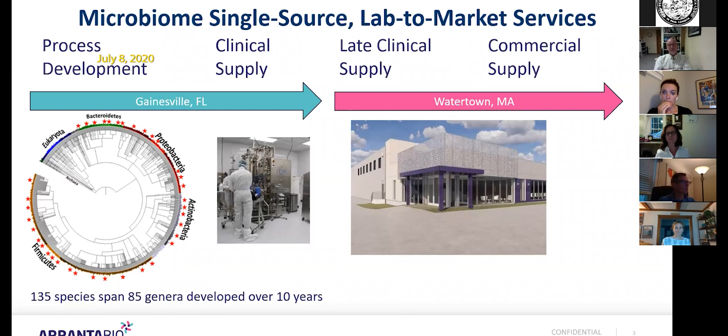This is a nice little rendering of the two-story building. We're going to dress it up a little bit—we put some windows up above to let natural light into the building. He will go over some of the changes we're going to make on the outside. We purchased and we're going to renovate 650 Pleasant Street; it was a high bay warehouse owned by a number of people.

We're turning that into lab space and light manufacturing, along with a new 5,000 square foot office and visitor space, which is right here. We're going to dress up the front of the building as well, put some nice landscaping in there, and make it a nice outdoor amenities area for our employees. We do actually have current offices at 480 Pleasant Street that we're leasing out right now.

That's while it's being built and into the future, so it's actually a great walk between there and 650. You have to go right by Russo's, so that's not the worst thing in the world. And then again, a little less than $100 million investment into the Watertown facility, and our goal is, if not by the end of the year, then close after that, 100 plus employees.

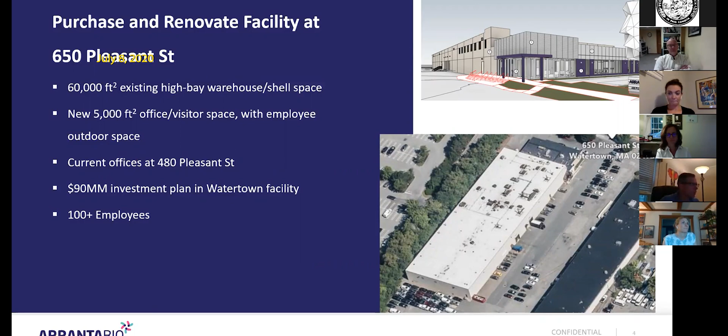This is the overall facility. Here's just to orient yourself. Here's 650 Pleasant Street. Here is the Stop and Shop parking lot, the river, and obviously the area of concern back here. And so, Hugh, I will turn it over to you.

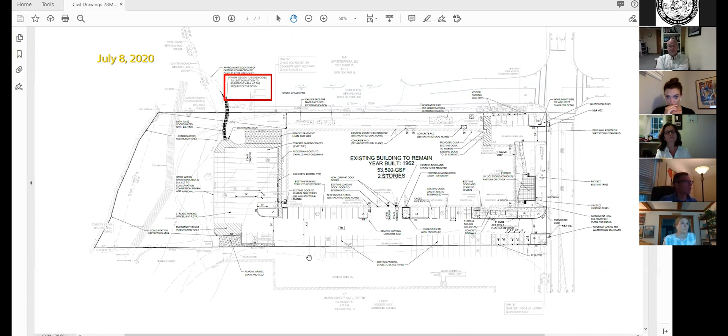Hugh? Sorry about that, I was sitting here quietly, but muted.

By way of a little orientation, the 200-foot riverfront area extends up from the bank of the Charles River and diagonally cuts across the back, the top corner of the back parking lot. You can follow Richard's hand there, helping me out. It barely touches the top left corner of the building there. So work within jurisdiction would be within that riverfront area back toward the river.

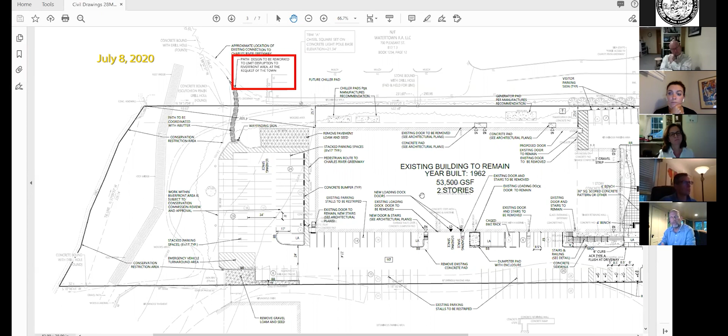Arranta Bio had also, under their special permit, been proposing to expand the building out on Pleasant Street. When that building expansion proved less desirable or infeasible for certain reasons, Arranta Bio decided to work within the existing building footprint and not expand the building out there. But rather than leave that existing drive aisle in the front, they decided to put their employee amenity area out there and also increase some landscaped area. That was something that Richard alluded to in his presentation.

So with the employee amenity area at the front of the building, there was less of an impetus to get the employees in and out of the back of the building down to the river, the Greenway. So that connection from our rear parking lot up the page, tying into the Stop and Shop section of the path, is going to be eliminated. It is not going to be built.

Arranta Bio has agreed and has been trying to contact the property owner and operators at Stop and Shop to coordinate on an improvement to the existing sidewalk along the west side of Arranta Bio, the common property line between Arranta Bio and Stop and Shop. That would enhance pedestrian access from Pleasant Street down to the Greenway, as sort of an exchange for not making a pedestrian path off the back parking lot. I think that will lead to less disruption within the riverfront area.

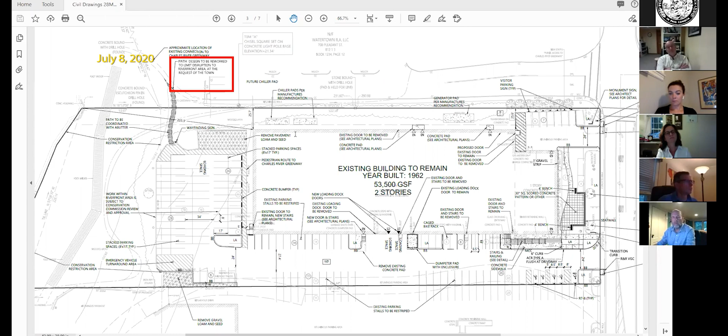Richard, if you can go to the utility plan or the grading and drainage plan, the next one in your deck. This one? There's a little delay on my screen. Yes, that one. There's a catch basin with 4 little black tabs at the very bottom left corner of the site. That's an existing catch basin installed several years ago by a previous developer, and it's at the low point of the parking area.

It connects to an oil and gas or oil and grit separator in a manhole just up from that, and then discharges to a small plunge pool at the end of that culvert, and from there that water runs across the surface eventually to the Charles River. There's also another catch basin over to the right with the 4 black colored tabs - those symbolize a construction period silt sack installed in existing catch basins during construction, so any mud tracked on the pavement gets caught in that silt sack before it gets into the catch basin.

We replaced that catch basin with a Stormceptor 450i, STC 450i, which is the catch basin size particle separator, and that was at the request of the town.

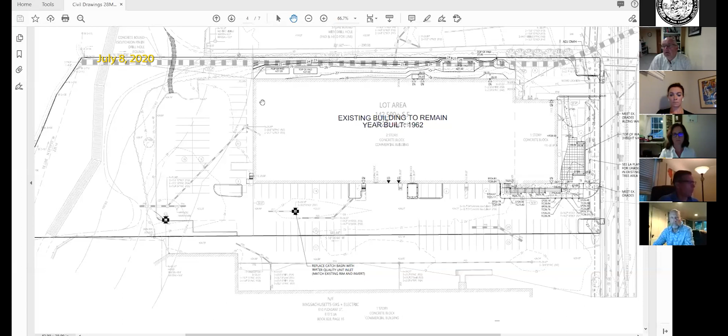So we'll start with that, that's my first question. Go ahead - your screen's catching up. The proposal is for the area at the upper right corner of the parking lot in the back that has that triangle hatch in it. We're removing the pavement and replacing it with loam and grass seed. There's another area, kitty corner across that parking lot, where we're proposing the same thing - to take up some broken up asphalt pavement and bring in loam and grass seed.

Yeah, I can see that, but I can see that, for example, the parking lines don't match up, so you're not just leaving the lot untouched. Can you talk about what the extent of the work in that area is like? Because I think that's the first issue - that form isn't filled out, and we have to make sure the proper box is checked. We need to make sure it's clear whether this counts as a redevelopment project, because if it does, we have to make sure the stormwater standards are met and so on. So if you could walk us through the extent of the work in the lot.

Okay, so those things I've mentioned, and then the rest of the work on the pavement is pavement striping, which would be considered essentially maintenance. The diagonal hatching is what I'll call gore striping - a stripe on the pavement that indicates it's a place not to be parked. In the bottom left, there's an emergency vehicle turnaround area that allows a fire truck that's come down to the back of the lot to make a hammerhead turn and get back out of the site.

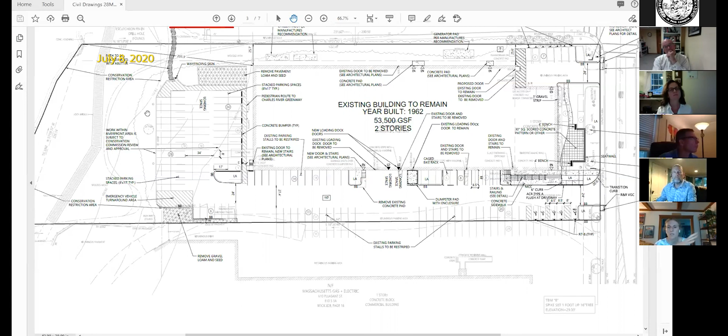Okay, and then when did the back convert from forested to paved? Because I'm looking at the aerials, and the ones from the 90s show it forested, then around 2001 it's cleared. So Laurel, do you know if we have a permit on file for that?

We should, I can look into that. Yeah, just make sure that the clearing back there is done on the level, so to speak.

As you're looking through that record, the one order of conditions we found was the one I mentioned around that catch basin at the bottom left corner of the parking and the oil and grit separator. That was an order of conditions that recognized that area was paved and was a drainage improvement.

That's good to know. And then the middle line in between the 100-foot buffer zone and the 200-foot riverfront area, is that the 150 buffer zone line for the Watertown ordinance? That 150-foot line probably is right where Richard's hand is now. The 100-foot buffer zone is just off the limits of the pavement, so the 150 runs diagonally through the middle of the rear parking area.

I think I didn't see it labeled on any of the plans. So assuming that is the line, I think we just want to add that label so that we have that documented.

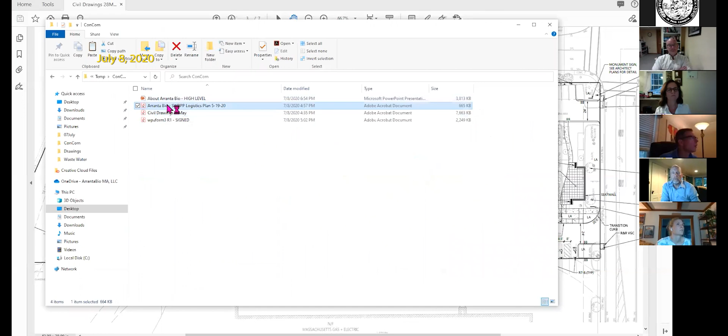DC Beane Associates, as the general contractor, did submit a stormwater pollution prevention plan and logistics plan, and it shows a silt fence and straw wattle around the perimeter.

So the darker purple is a silt fence, or sorry, that's a perimeter fence, isn't it, Joe? Yeah, and it would be a construction security fence. The lighter periwinkle along the Stop and Shop side and around three sides of the rear parking, that is a straw wattle.

Go ahead. Oh, no, well, I think I would prefer the compost filter sock over the straw wattle. Being that close to the riverfront area and the resource areas, I would prefer what I think in my experience seems to be the more superior erosion control product.

So Jamie, they've started construction over a year ago. Yeah, but if they're still under construction, there's no reason. I mean, we have to issue a permit for it, right? We still haven't, no, we never issued a permit for it, but they started. Well, isn't that what we're doing today? Yeah, we're issuing a permit for a job that started a year ago.

So if we're issuing a permit, then it should be how we think it should be, right? Right, correct. So that's what I would recommend.

In the NOI form that was submitted, it said that there would be material storage as one of the items. It was a very brief project description, just a sentence, and it included material storage. So I was wondering if you could talk about what materials were going to be stored and where and how.

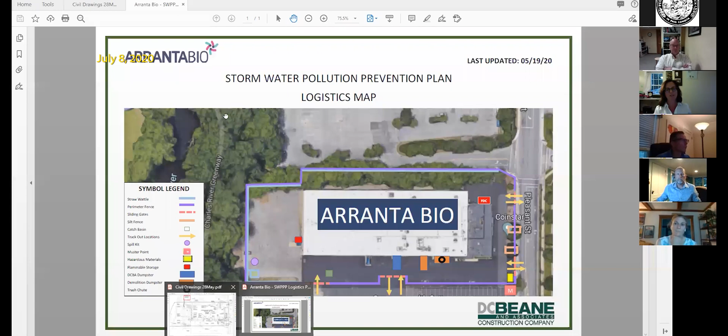I know you said you considered a rain garden, and now that your employee amenity is not in the back, it's in the front, it may not make sense anyway. But the area that you removed, you're removing some pavement or gravel, I think it might be that blue square. There might be a delay because you're pointing down where it says remove gravel, loam. The lower one or the upper one?

The lower one where the little hand is right now. Couldn't that have been utilized for some benefit to stormwater there, or is it just that it slopes onto the pavement, so there isn't any pavement that drains to it? That catch basin right there is at the low point, the localized low point.

So if we put something in that tries to filter runoff, it's just filtering rainfall, so the loam and seed will do as good a job at that. Nothing that runs off the pavement can get to it. So that's why it wasn't moving the amenity area that made it less feasible to do a rain garden here, it was just the fact of the direction of the drainage.

Okay, all right, I guess that makes sense. And is there any thought of just adding something that might be, however marginal, like some sort of habitat, even if it's not stormwater related, whether it's a tree or some sort of pollinator plantings or whatnot?

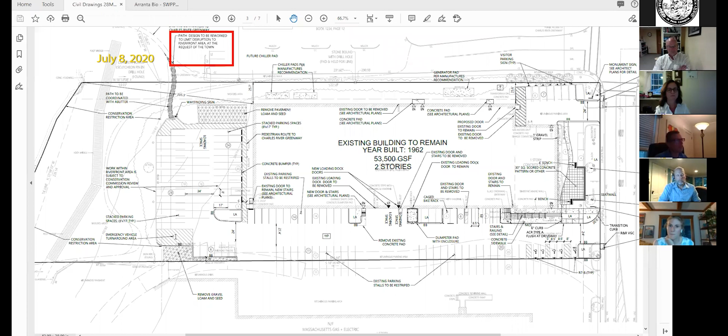I like that idea, that's something I'd like to take into consideration. I think that would be a great employee activity. Maybe we can just leave it as loam and seed now, and then when we move into the building, have our employees do something - that could be a great activity, buy a few plants, go in on a Saturday and have a little employee activity, get to know each other, since we're such a new company. I think we can use that as a team building exercise, so if we could leave it on the plans as loam and seed, but get some ideas from our team on how we can maybe put some plantings out there.

So what I was thinking - I don't want to make it a big production since you're already underway - is you have like a scupper that goes into that small area, and it filters some of the pollution, connecting right back into that catch basin. It would be a way for some of that water in that area to make like a U in that flat area if possible, then connect to the catch basin for overflow.

We can certainly look into it at a little larger scale and see what the grades will allow. And if they don't, that's fine.

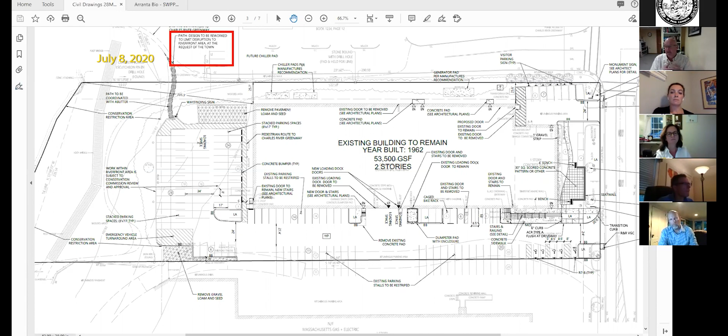The drainage drawing on C3, I'd like to see all the lines connect. These are just guesswork. There's a lot of manholes, a lot of lines, but none of them connect. And I'd like to see drawings, to me it's which one goes where. You get all these lines and they only go like 10 feet beyond the manhole. I want to see them connected. And these diagonal lines that come out, are they from rain leaders? I just have no clue what they are.

They're not labeled, so the drainage drawing is really not quite up to par. With regard to the Stormceptor, I didn't know that the item on the lower left corner, as I'm looking at it, goes into some controls, grid controls. It wasn't shown in the drawings. So I'd like to see all that stuff on a drawing.

This is our chance to help the river, and we don't do it with this. We're not controlling any phosphorus that goes off of this site. So I was wondering if we could put a manhole in one of these last manholes, put something that would filter out phosphorus. It's our chance to do that.

Also, there is a line that comes off of the Mass Gas and Electric site, which is no longer Mass Gas and Electric, and that goes somewhere. I'd like to know where that goes as well. So I just want to see a drainage drawing that's complete and shows where these lines go, and label the roof drains. It would be nice to see those.

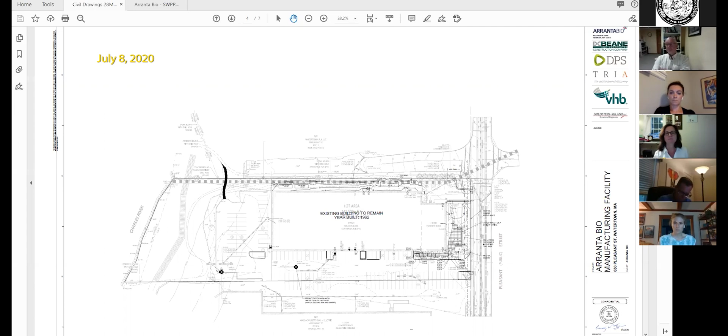I'd like to have the opportunity in the follow-up to make the case, to look at the criteria for a redevelopment and evaluate those against the site and what's the activities that have been here, and give you something to review as to whether or not it's a redevelopment. Among the checklist, the more extensive existing conditions plan, which shows you more of the wetland flags, as well as the wetland flag delineation records, the field report.

That's fine. Just make sure that it's not just what happens within the 200-foot riverfront, it's the project as a whole that triggers redevelopment. Yes, thank you, thank you.

So if there's any questions from anybody else listening? I had my hand up, Leo. I can't see that. Who's that, Elodia? Yes Leo, it's me.

Jamie, thank you for all the comments you had about the back parking lot, because I was totally confused about how many cars were going to be parking there. I don't think we should leave these little areas for loam and seed to amateur hour. I think they should have to give a landscaping plan for those areas, it's too critical in town.

As far as the path between Stop and Shop and this project, I think you should have a plan for that as well with wayfinding signs. We know in this town we have very little connection to the river, and it's quite important to the community that these are clearly laid out.

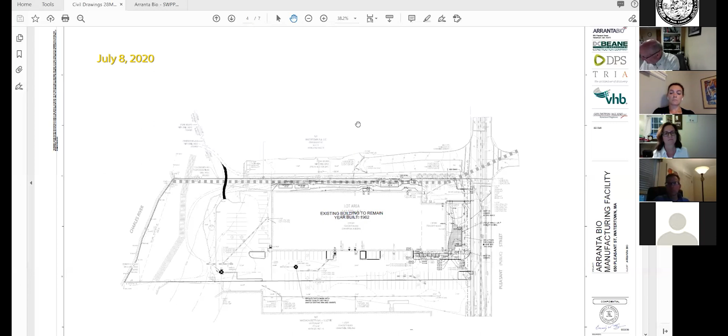So do I have a second of that motion? Second. All in favor? And we got to do a voice call. Colleen? Aye. Jamie? Aye. Maria? Aye. Charlie? Aye. Leo, Patrick? Aye. And Leo is aye. So the motion carries, we're continued until our next scheduled meeting. Thank you all very much, very much appreciated. Thank you.

Okay, so we can go on to our, thank you all for that. That was a very good meeting. Good comments, thank you so much.

Next would be the minutes. And I know that Patrick's had some comments and he sent them in to Laurel. Yep, so we'll incorporate those. I just had one comment on the, okay, let's go month, March 4th meeting. Does anybody else have any comments on the March 4th meeting?